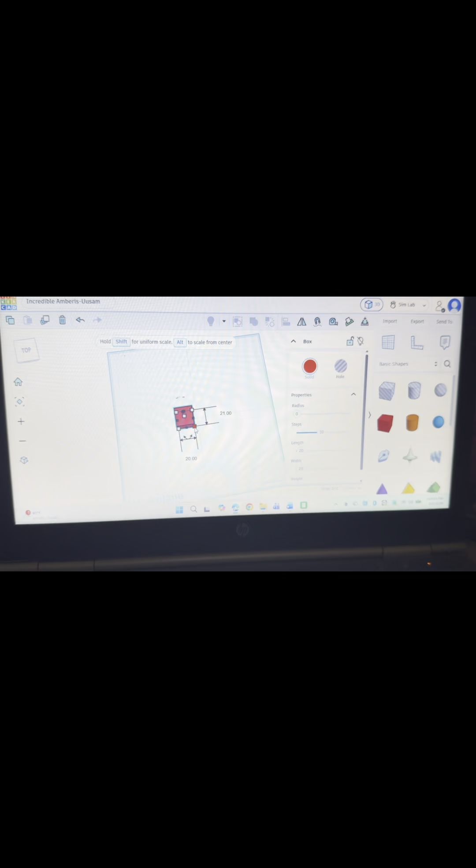So you can either drag, or I just like to click in the box and change my values. So I'm going to go to 118, and click on your top box so that we have a perfect square.

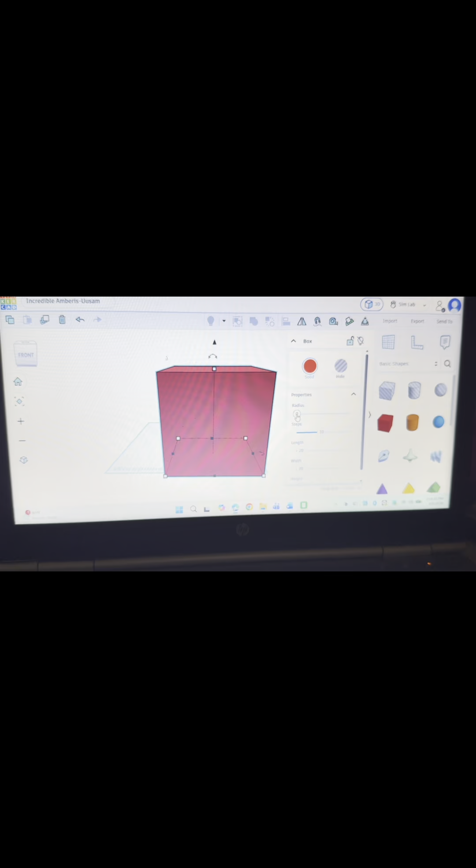Now as you can see, that's like a perfect sharp square, but I wanted something just a little bit softer. So I'm going to click on my square and go over to where it says radius, and I'm just going to slide the slide bar slightly and see how it starts rounding the corners. You can actually basically make it a circle. So what I'm going to do is just round the corners slightly because I don't want to mess with the dimensions too much.

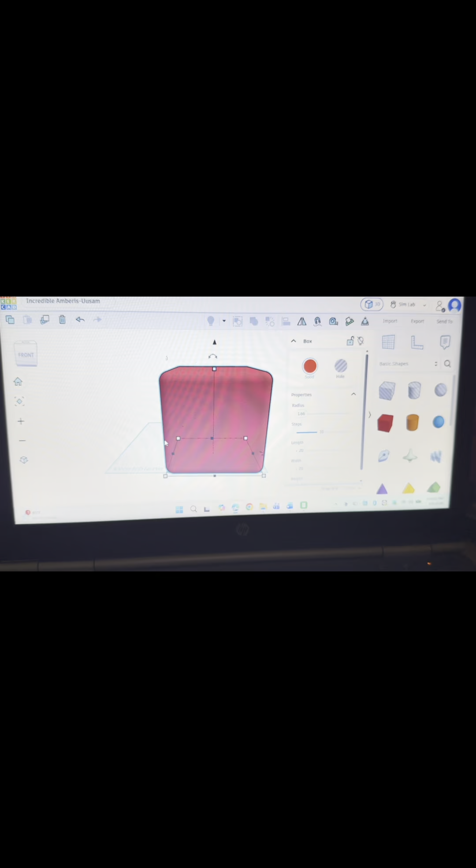Now what we need to do is make a hole through the middle where the box will sit. So I'm going to use Control D, which is duplicate. I like to use my arrow keys to slide it over so I can see what I'm doing. And we need to make it a hole because we want to cut a hole in the middle.

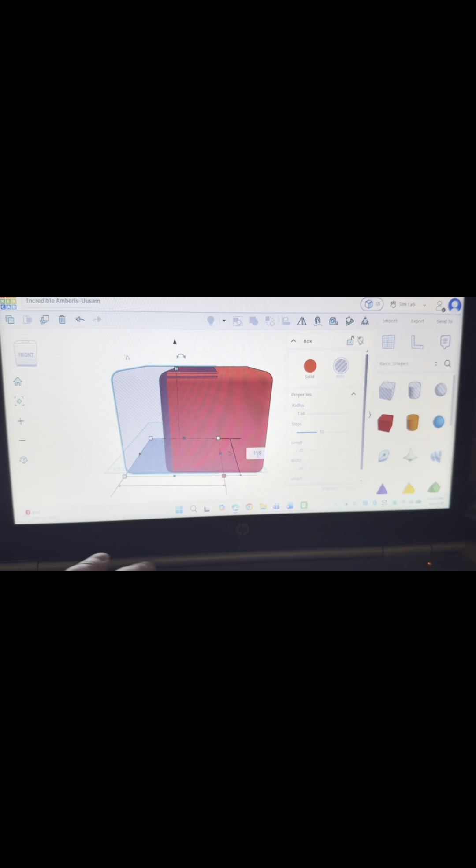Now, the important part is to make sure that it's smaller than your solid. So we are going to size this down from 118 to 116, and make sure you do it the whole way around. Now, we are going to take our arrow and move this down a few millimeters because we want to make sure that there's a hole in the bottom to slide the box through.

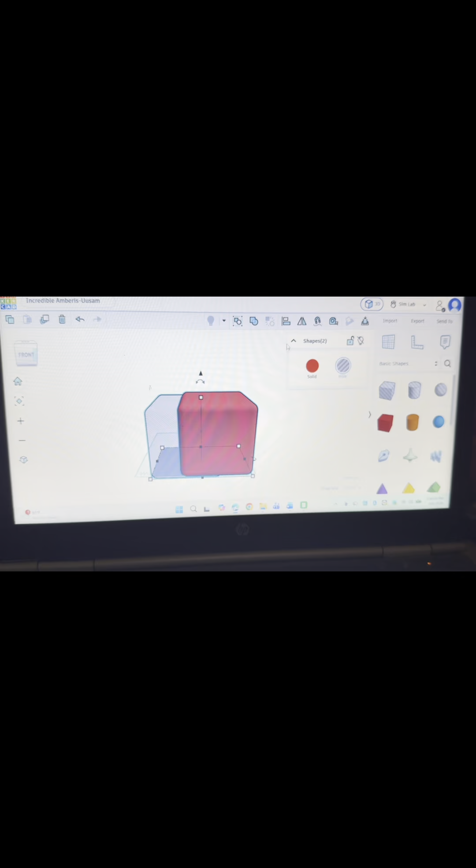Now let's highlight both of our objects, go up to the top to our align tool. We are going to align in the middle and front to back. Now, let's highlight them and join them together. And when we look, we should be able to see a hole in the bottom. Now you can see the whole bottom of our object.

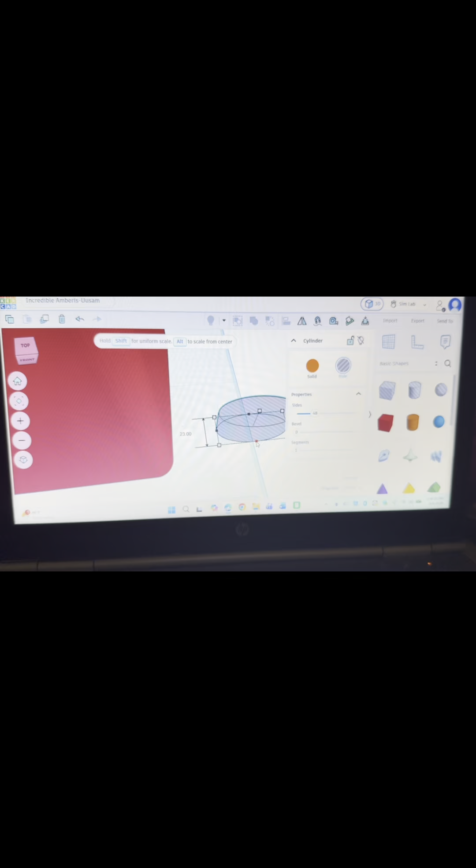But now we need somewhere for the tissues to come out. We're going to drag in a cylinder and we're just going to resize it. I'm just going to drag it to where I think my hand would fit in to grab a tissue. So we're going to use our little arrow to move it up.

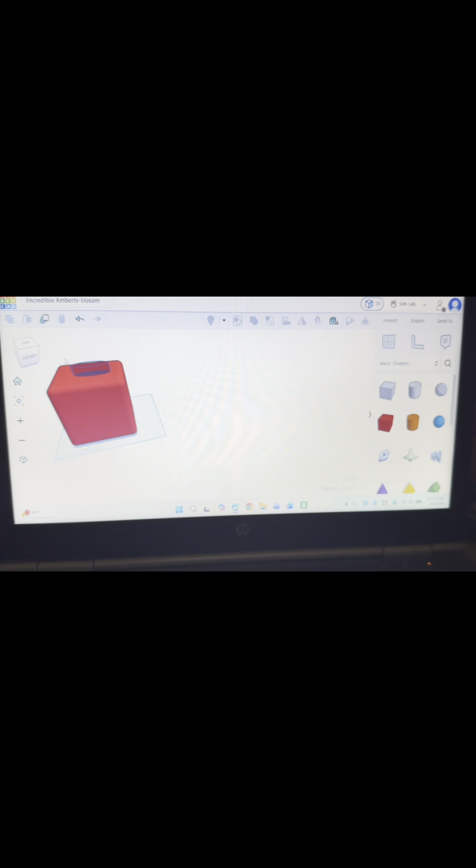And then again, I like to use my arrow keys to move my objects around. I'm just going to sink it down slightly, and now I'm going to highlight both and use my align tool to get it centered. Center in the middle, center front to back. I'm just going to drop it down a little more just to make sure that it pokes through the top.

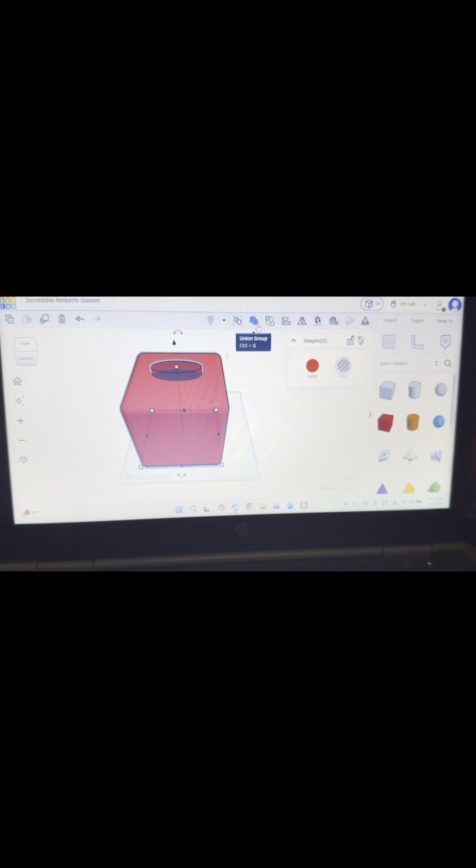Now all we need to do is highlight our object, go up to the top to group them, and there you go. There's the hole in the top, there's the hole in the bottom, and you just made a decorative tissue box cover.